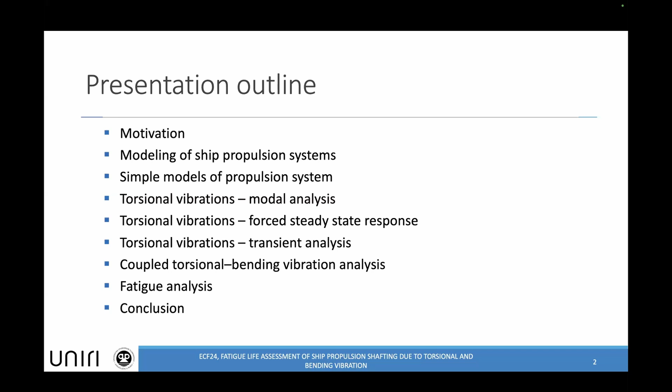This is the presentation. It is mostly about vibration models and how they impact the fatigue assessment.

The International Maritime Organization has mandated that carbon dioxide emissions should be greatly reduced. For all ships, this means they need to sail slowly, and for new ships, to install smaller engines.

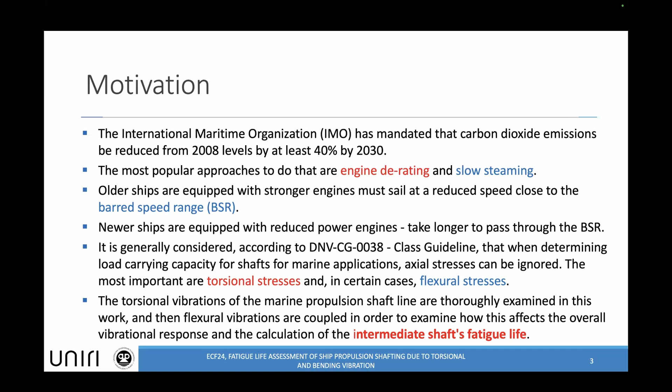Considering classification organizations, they recommend that mostly critical are torsional stresses and in some cases flexural stresses. This research investigates how these flexural stresses could impact or decrease the fatigue life. The focus is the intermediate shaft of the marine shaft line.

Traditionally, shaft lines are considered as driven by axial excitation and consequently stresses, also torsional and bending, where the torsional stresses are considered the most critical.

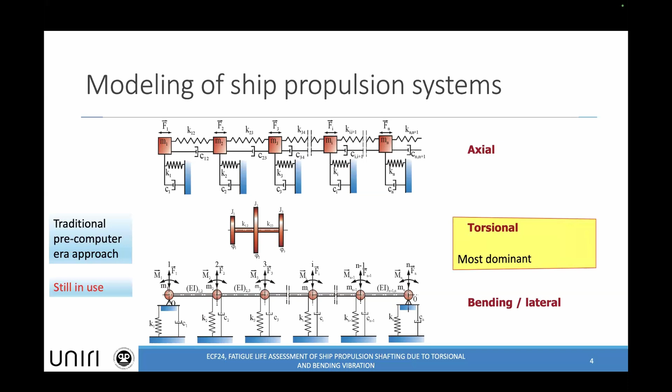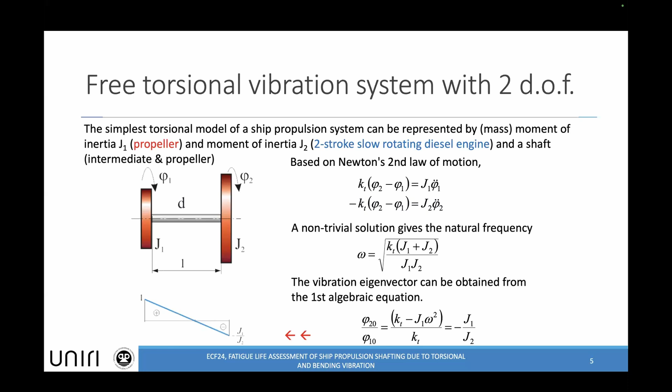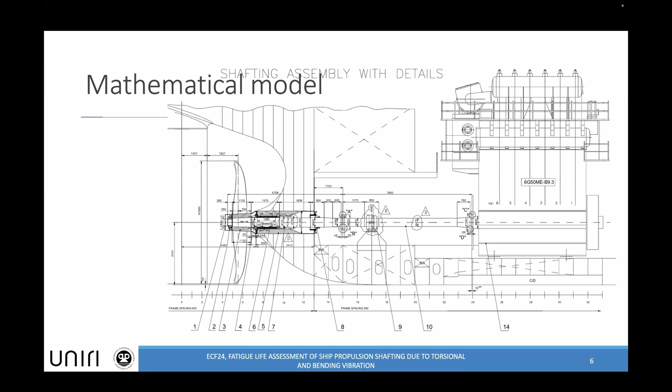This is the most simple torsional model, and the first torsional mode shape looks like this. In a real ship, it is a more complex model, with a shaft line and a lot of influential parameters.

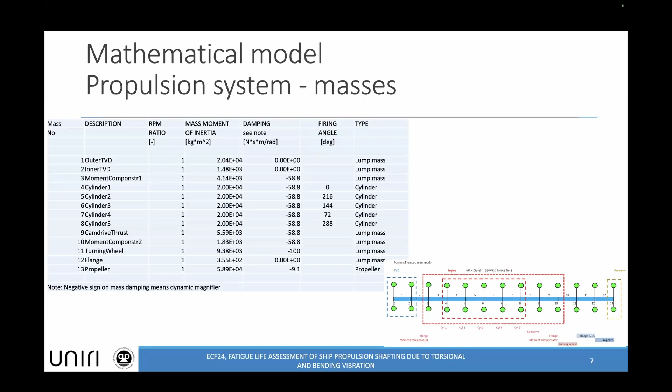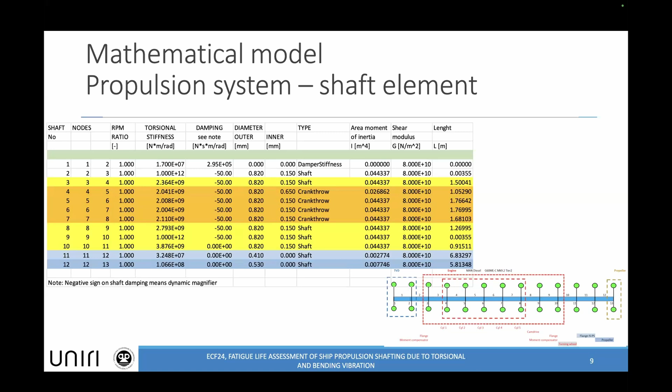If we apply finite elements, we can use two different approaches: lumped mass or distributed mass. The simplest approach is with lumped mass, where masses are considered rigid, and the shaft elements could be replaced by springs.

Considering engine data, this is the hardest part of this investigation, to find the data for the engines. In this case, an 8.5 megawatt engine is used, and it has 5 cylinders.

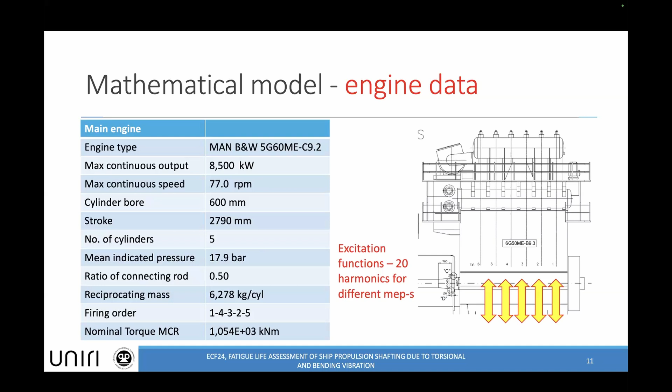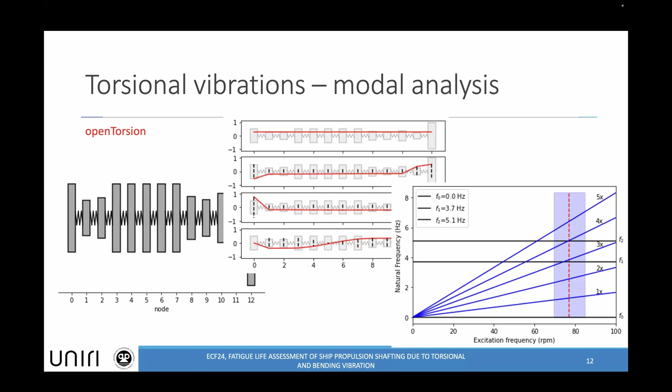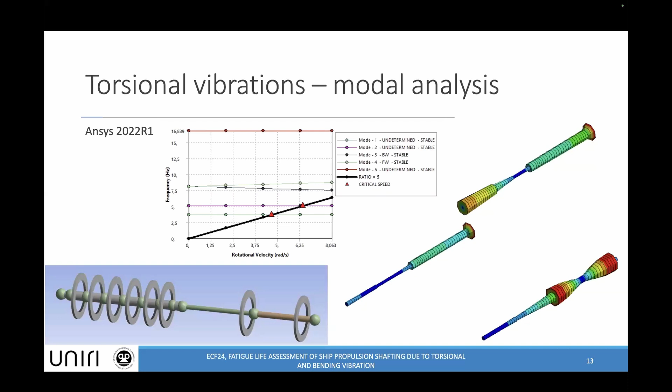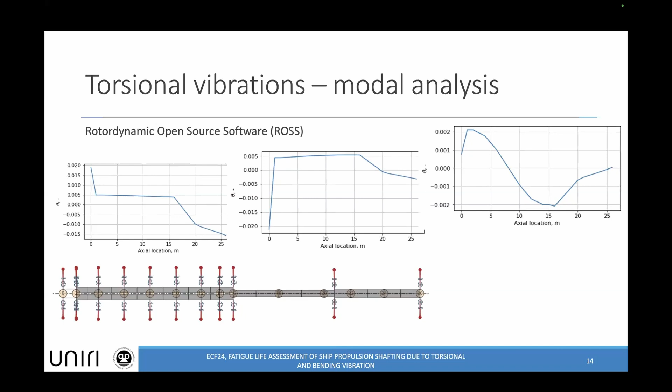Three different approaches are applied, considering two open source softwares to be used in Python and ANSYS as well. The first is OpenTorsion, developed by Aalto University of Helsinki, offering only torsional vibration. ANSYS could do everything, but some difficulties could arise with additional masses and dampings. Also, from Brazil, Petrobras developed ROSS, Rotordynamic Open Source software.

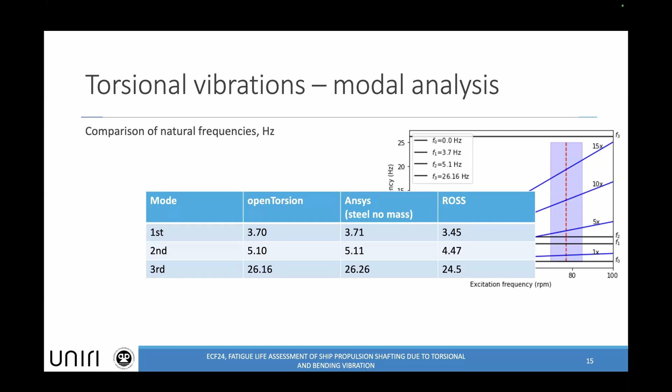Comparison of their results shows very good agreement, though it must be pointed out that different approaches are considered with lumped and distributed mass. ROSS basically uses distributed mass, ANSYS as well, but if you set density to 0, you can use only lumped mass with no distributed mass. OpenTorsion uses a lumped mass approach.

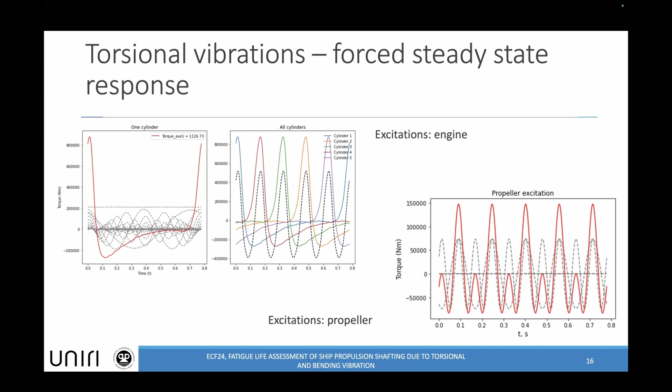These are the excitation functions, including excitation from the propeller. Steady state response at maximum continuous rating is presented here, and considering Det Norske Veritas guidelines, this is enough to assess the fatigue life of the shaft line.

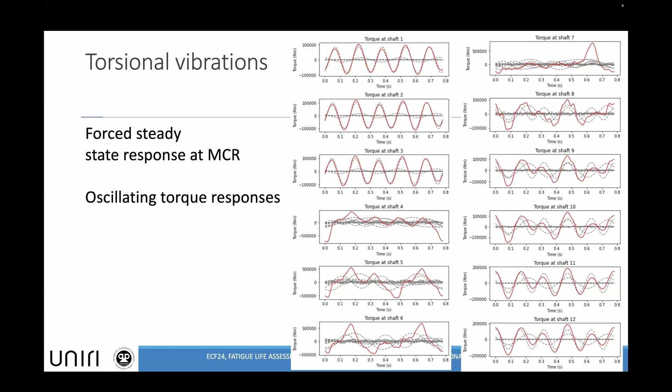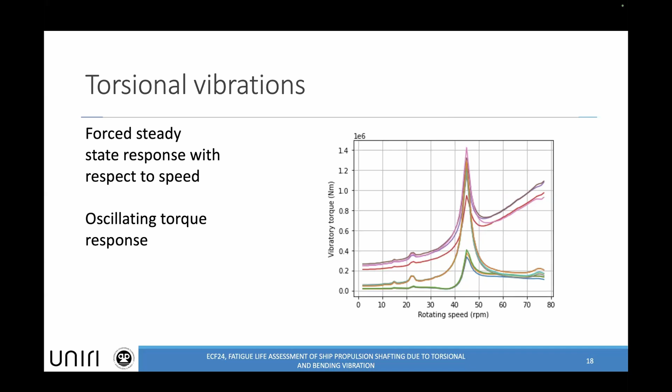And these are the torsional torque responses for each particular shaft element.

So, advantages and disadvantages: OpenTorsion didn't have transient analysis at the beginning, but we included it, so now it has. ANSYS has everything, but with some possible problems adding additional mass and damping matrices.

ROSS has everything prepared for flexural analysis, but they left compatibility for 6 degrees of freedom only at some level, so it needs additional programming.

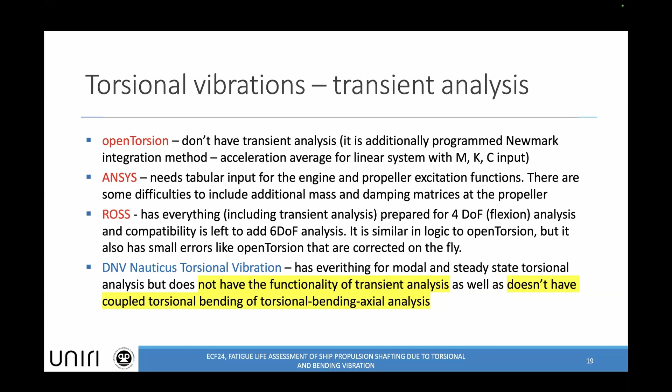The specialized program from DNV, Nauticus Torsional Vibration, has everything, but lacks transient analysis functionality, and doesn't have coupled torsional-bending analysis. Just to see what needs to be done for transient analysis.

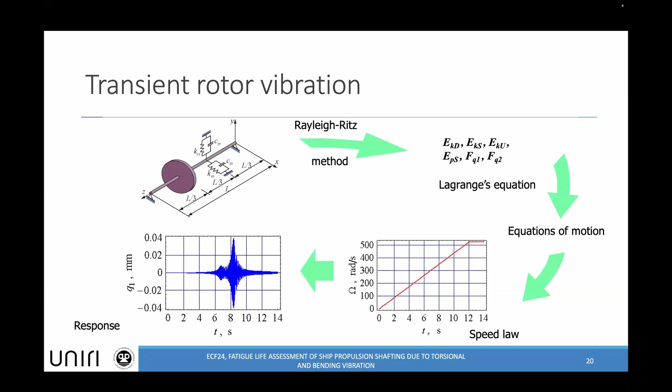If you want to obtain stresses at the end, in this case we assumed that the ship is running somewhat below the barred speed range, and that it needs 3 seconds to accelerate above the barred speed range, which is like a resonance region that should be passed very quickly.

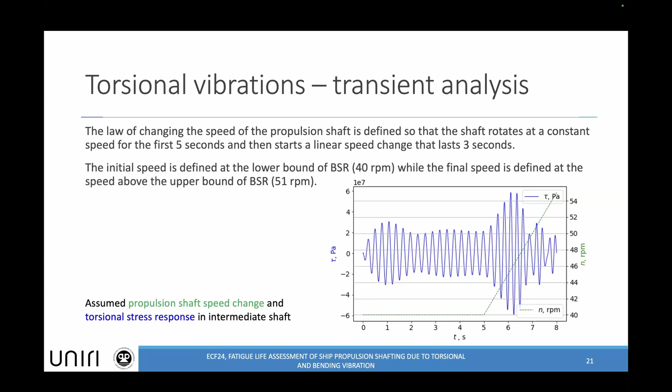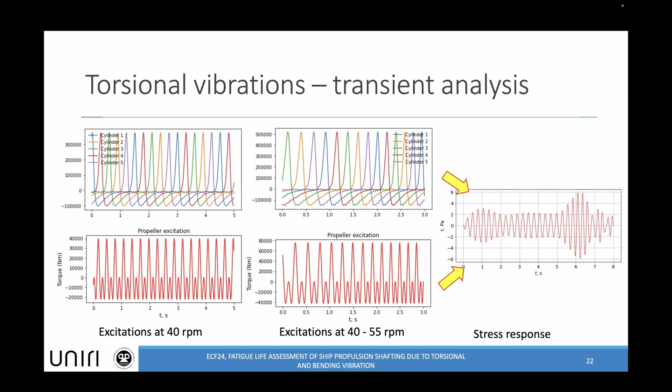So these are the engine excitation function and the propeller excitation function, and these are the stress response at the intermediate shaft.

These steps, some of them are already done, some need to be done. In all 3 softwares, torsional analysis is performed, and comparison is provided. Transient analysis is possible in ANSYS and OpenTorsion, and in ROSS it should be programmed additionally.

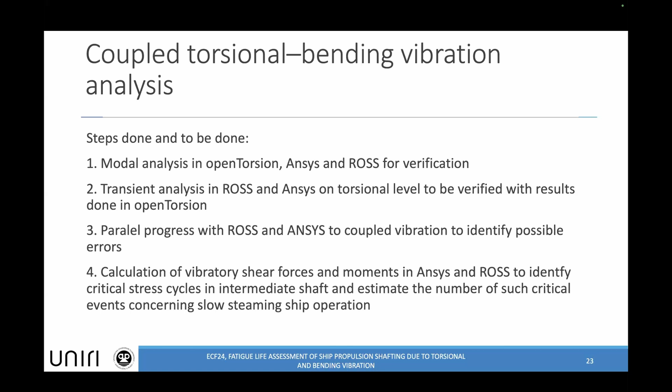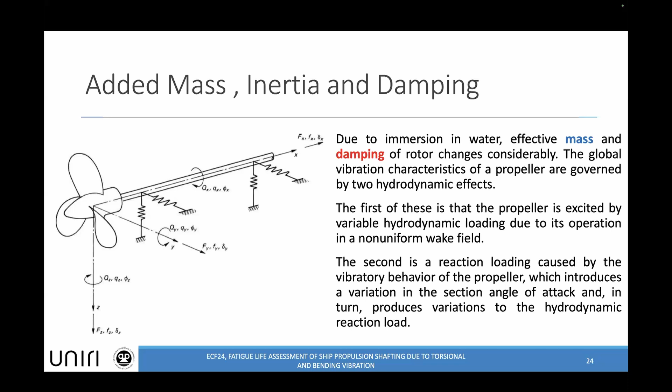The idea is to continue with ROSS and ANSYS in parallel to verify each other on the fly. The idea is to include the mass and damping matrices at the propeller position, which will be the position where this coupling between torsion and flexural analysis will be done.

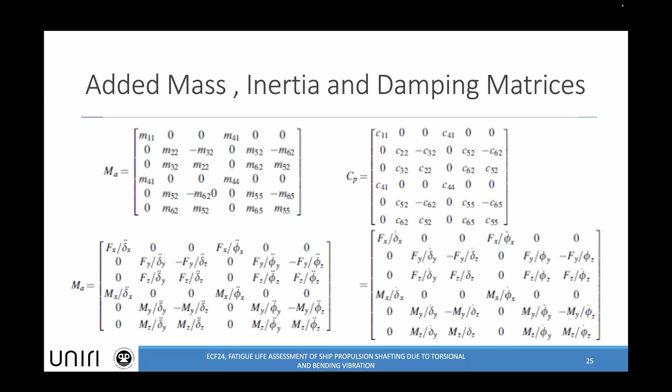So matrices of added mass and added damping look like this. Also, propeller excitation is included, as well as the propeller itself.

Considering fatigue analysis, DNV and other classification societies recommend focusing on torsional stresses. Our idea is to include flexural stresses as well.

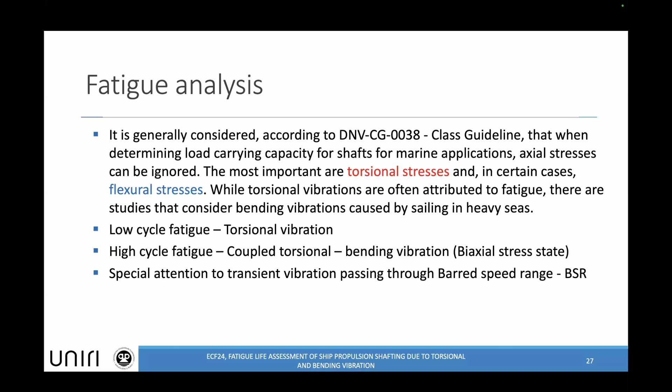Torsional vibration impacts low cycle fatigue. If we want to include bending, we need to consider it at the high cycle level. Special attention, especially for slow steaming ships, should be paid to the barred speed range analysis, and transient analysis when passing through this barred speed range.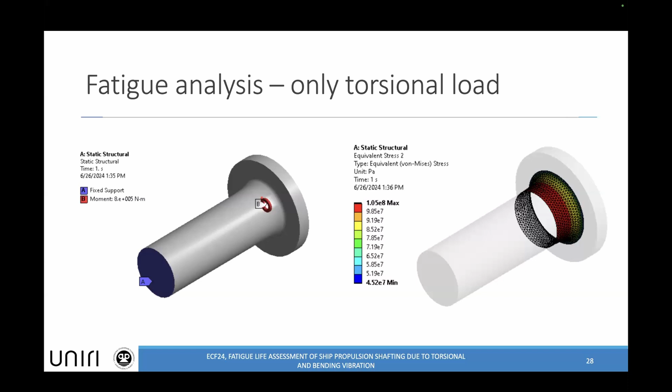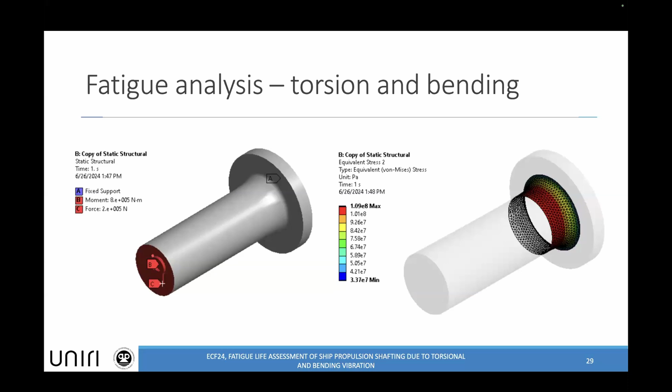If we additionally include the lateral, vibratory forces, we see some small increase in the stress level, some 5 megapascals or 5%.

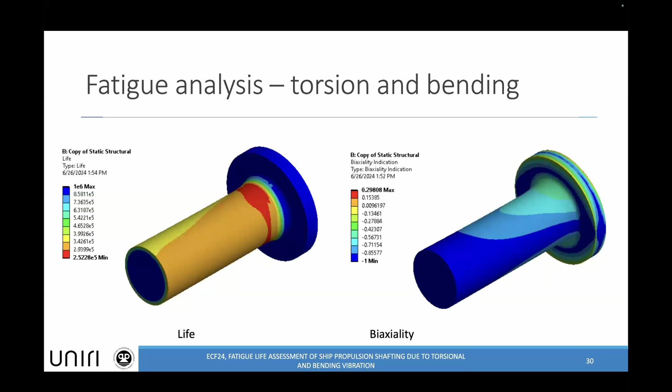Here we see the critical region considering the life. With this biaxiality indicator, we see that the stresses are mostly shear stresses, with some deviation toward normal stresses. Biaxiality should be -1.

I tried to present our approach where we want to include the coupled torsional-flexural analysis in order to investigate how they impact the possible increase or decrease of fatigue life of the intermediate shaft of cargo container ships.